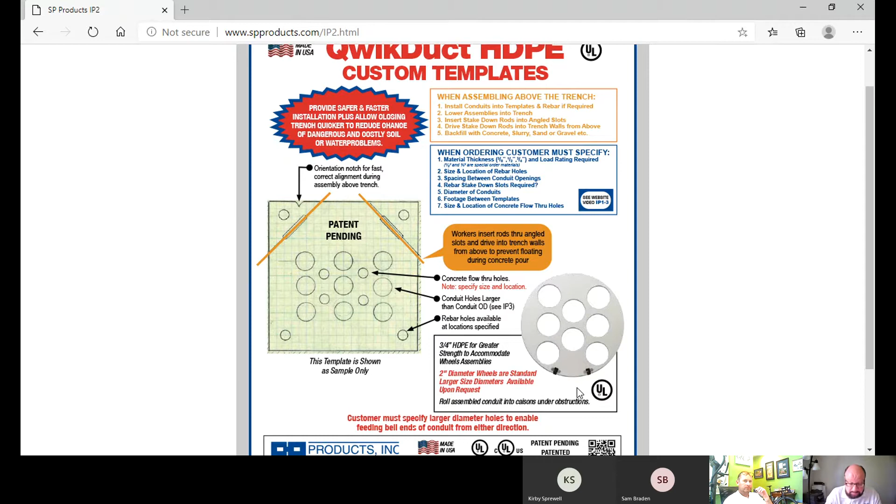So the other thing that we started with this product was we said, okay, so we're coming through into a manhole cover, or we're coming into a vault or a cavity inside a building. And most of the time now, you have to terminate or bring your cables into something. So what we developed was an end bell. And this is our PVC end bell adapter. We sell a ton of them.

It makes it very nice and easy for them to pull wire right into the cavity. It's very smooth, so you're not going to get it hung up on anything there, and you're not going to have any problems with your installation coming into the job. Now, I'll give you an example. We've done many data centers across the United States with this product, and we sell a ton of them.

Because when they're coming up into those server cavities, if you were using others, especially if it's any metal product, you're going to have bonding and grounding issues when you pull that cable into the equipment. With ours, you can pull cable directly into the equipment and it has no issues at all because everything's PVC. Saves them a ton of money. A regular data center job could easily use $1 million or more of these end bells plus our transition coupling line. And I'm going to show you that in a minute.

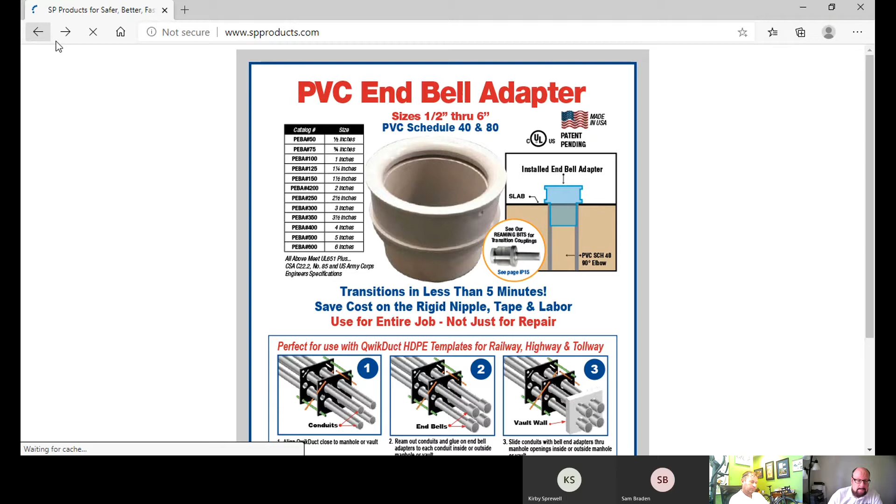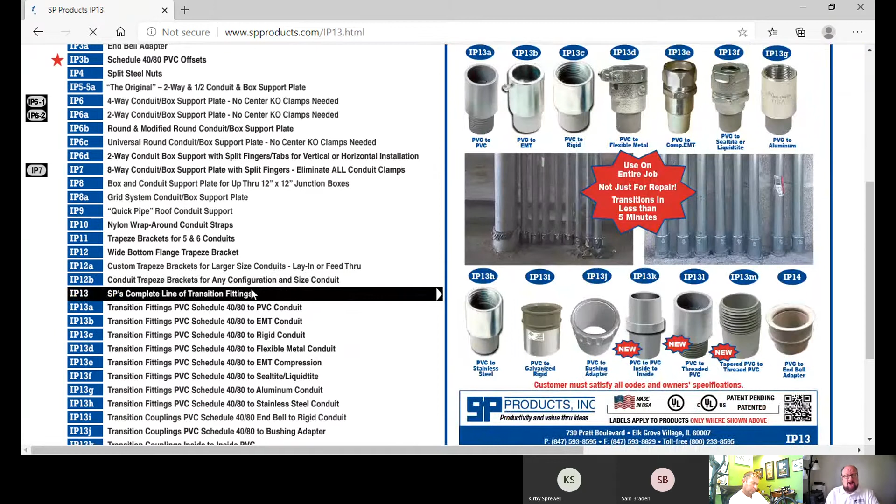So again, I'm still working and I'm building the building. I'm coming through my housekeeping pad and I'm wondering, okay, now I got to transition up. So when we call transition, the transition typically is coming through the slab, and now I got to convert it to another type of conduit. So what we do, we developed these transition couplings, and when we first started out, we basically had a PVC to EMT, a PVC to rigid, and PVC to PVC. That was our biggest movers initially.

And the reason being is when you come through that slab, most people are going to a metal product. Most of your local codes say that you need to have a 2-hour fire burn rating above slab. So that means most of the product has to be either fiberglass or metal to meet those requirements for fire and code. So what we did, we developed this UL rated assembly. We recently got the patent on this as a utility patent. So it's going to be about 17 years before any other manufacturer can make anything like this.

Okay. Now, if you've got customers that got stub ups coming through that concrete and, say, a Genie boom from the HVAC guy hit them and they broke pipes off, what do they have to do? They've got to notch the concrete. And I'll give you an instance. If you go into any contractor that does commercial work and you ask them, have you ever notched concrete because of a broken pipe? Most of them will tell you, yeah, I'm doing it right now. Well, here's a product that could save them a ton of labor units every time they're transitioning through the slab and to fix a broken pipe.

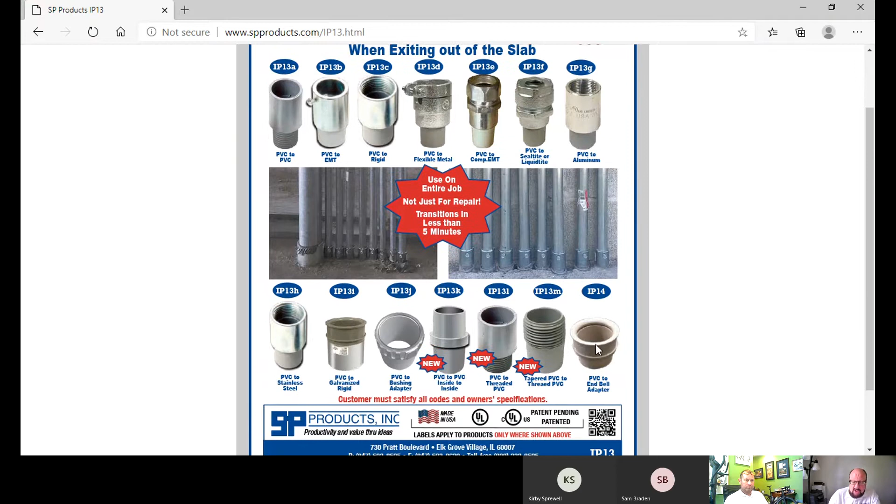Well, when we first developed this, again, I was telling you we had 3 of the major products, but then we had customers ask us, hey, what about Sealtite? Hey, what about compression? Hey, what about a squeeze style for the aluminum flex or armored cable? So we started producing a lot more of these products. And again, we've developed this whole family now of transition couplings. And again, our end bells are there. We make a PVC with threads on it. We make a PVC that's aluminum, stainless steel.

We're getting ready to make one that's going to be rated for corrosive environments like OCal or a PVC coating on the outside of a rigid conduit. There's other product out there now that they're using also. We came up with one right here in the middle. This guy right here is the PVC internal coupling.

Now that saved the contractor about 58 grand worth of concrete work because our coupling goes in the middle, inside each piece of PVC, where a typical coupling has to slide out over the outside diameter of a piece of pipe, which means it increases the overall diameter. Imagine if you're coming through a wall and your pipe's cut right there at the wall. Now you've got to notch every one of those pieces of PVC in the concrete and slide your coupling to get that OD over top so that you can use that coupling.

Then after you're done all that notching of concrete, you're going to send one of your apprentices out, or one of your low-hanging fruit labor guys. He's going to go to Home Depot, Menards, or someplace, buy some Sakrete, a 50-pound bag or more. He's going to get a bucket and a trowel, and then he's going to be a mason for the day because he's got to fill in all that stuff where he chipped it out and make it look nice, not only for the building owner, but also the inspectors.

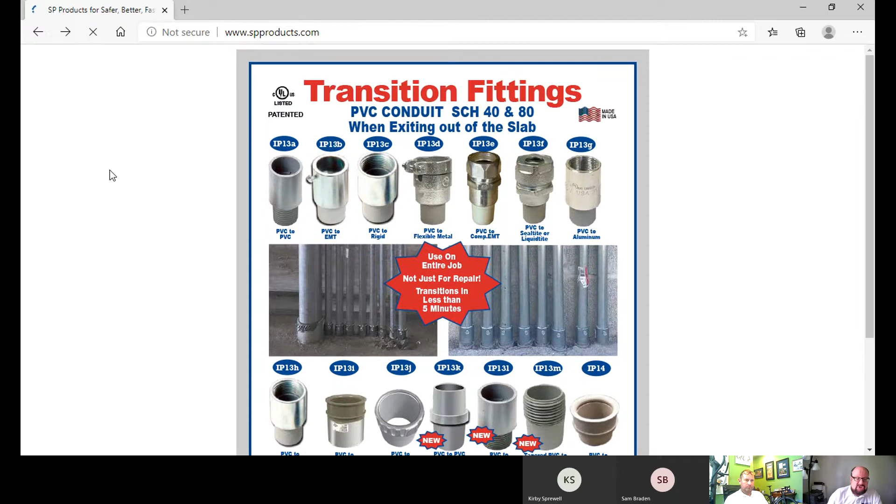On that PVC internal coupling, it only took us about 3 weeks to figure out what we could do for this guy, put it all together, and have UL product shipped on site so that he would be able to use it. So again, we have quick turnaround time when it comes to this stuff. And we'll have a separate sheet for each one of the different ones.

Let me just show you, when we go into the fitting, we'll go PVC to rigid, which is a real popular one. So what I do is open this sheet up, for a second here, the page isn't building, I don't know if my internet's slow or something, it didn't pop up. All right, so here's the page.

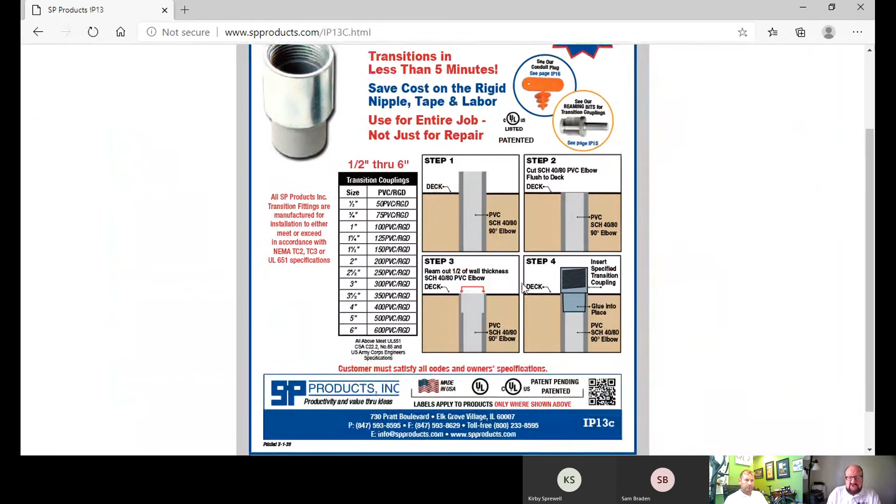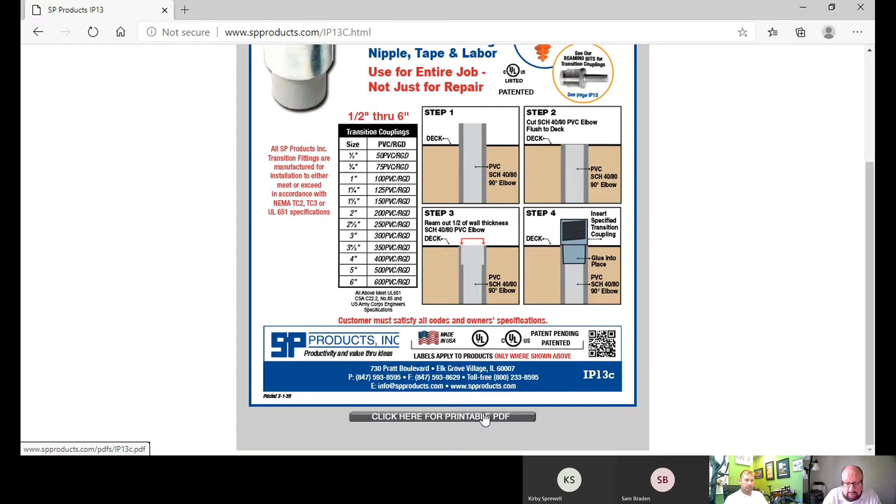Right down here at the bottom, it says click here for printable PDF. That's where you would click that button, and then you could right click the page that pops up and save that document. Then you could save that PDF, put it in an email, and send it to your contractors. That's how I send a lot of my information to contractors so they can see the product without having to go through the entire website. And this would be all the engineering information he would need.

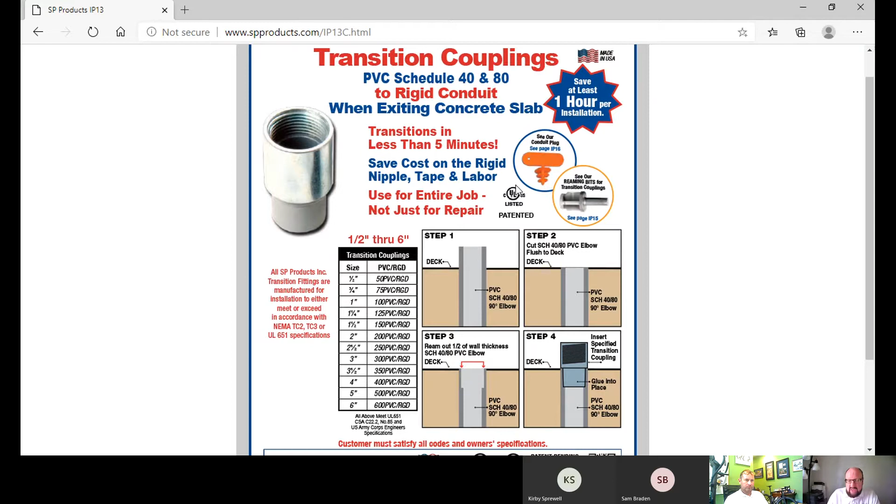We even sell these little orange caps that they can put on their stubs so no crap falls in the pipe while it's sticking up out of the floor before they transition. We also give you a little hole in that tab so they can put a pull rope on there, or they can label it. They can also label across the front of it. This little orange cap will handle multiple size pieces of pipe, and you just slap it in the top of your pipe and it keeps everything nice and clean. It shows you all the different sizes and the steps and procedures for how to install them.

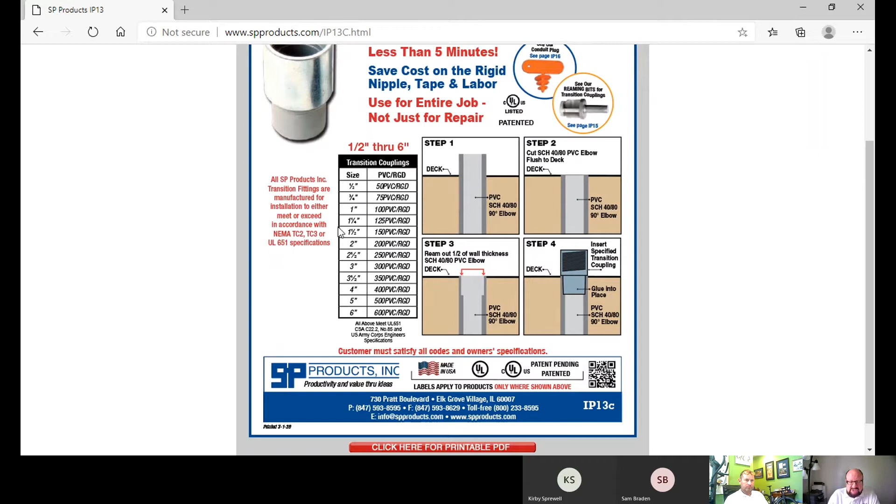And again, we sell a ton of them. And again, once I show this to a contractor, he's never going back to notching concrete again, because he knows it's a waste of his time. It's a waste of labor units. And to be honest with you, it's not the electricians breaking the pipe off at the floor. It's the HVAC guys. And they will never fess up that they did it.

But on any contractor project site, the HVAC guys come in with their genie booms and they just start driving those things around. They don't look down on the ground or where your stub ups are. They run them over. And next thing you know, you come in the next day and you could have 35, 40 pieces of pipe broken off in one big project. And now you got to send your young apprentice over there to start notching concrete to try to get an opening around that piece of pipe to slide a coupling on it. Very expensive, very costly to the bottom line of your job as a contractor.

So again, just ask the contractor, have you ever notched concrete? And once they say yes, I got a product for you. And then just show them this product and it will sell itself. He'll understand right away. And you as a rep, what we're going to do is we're going to give you a wooden block where we show you some stub ups, and then we'll also have a piece of pipe in that block. It's a 2x4 we use, and that piece of pipe will be reamed out. We'll also give you a 3/4 inch reamer bit and a couple of these 3/4 inch transition couplings.

And you could show the contractor, hey, put this in there, and now you can see exactly how it works. Stick your finger in there. You're not going to feel any degradation at all, no ridges or nothing. The finger's going to go through nice and smooth, and it will be transitioned perfectly, so they know there will be no catches or no hookups when they're pulling their THHN or wire through it. It's a great product, and we sell a ton of them. We have a lot of distributors now starting to stock them, so that's good for us. And we tell them only stock the ones that the contractors are using. And most of the time, like I said, they're using PVC to EMT, PVC to rigid.

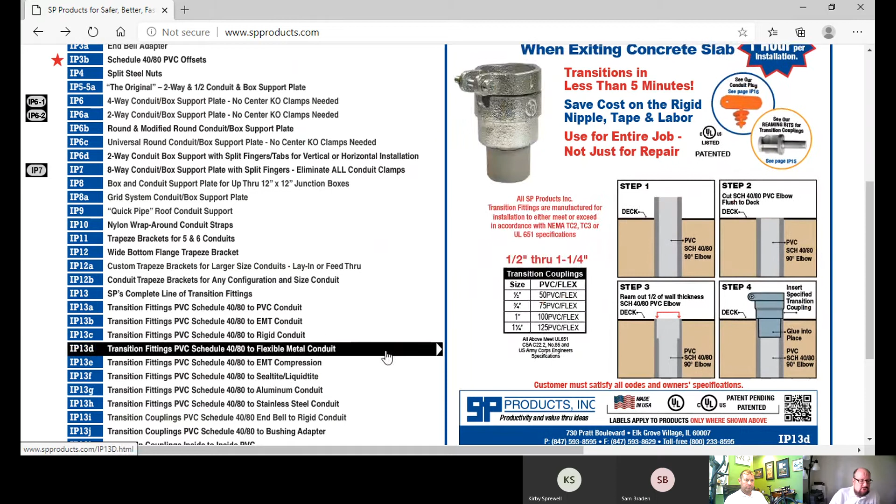So the next thing we're going to talk about is our trapeze. So our trapeze, we're coming to overhead now as we're doing the building. So now we're going to be running pipe in the ceiling. And I'm going to give you an instance. A lot of people use strut with straps, okay? So how I sell this product to contractors is saying to the contractor, okay, here's my trapeze. We have one with 5 holes and we have one with 6 holes. The 6 holes is fairly new for us. We started out initially with 5 conduits per foot.

So now when you start looking at your pipe, you're pushing that pipe through that opening in that hole, and you're putting your coupling on, and you're going to the next one. So now from a labor unit standpoint, I've got guys in Florida at $32, $37 an hour, and they're finding savings using this product.

So I know right now, if you come into an area, I'll give you an example, Philadelphia is $94.50 an hour for a union electrician. Go up to New York, Local 3, any of the 5 boroughs in New York, you're talking $130 an hour for an electrician. So when I sell this, I tell the contractor or distributor, okay, what's it cost you for a 10-foot piece of channel or strut, whether it be Steel City or others?

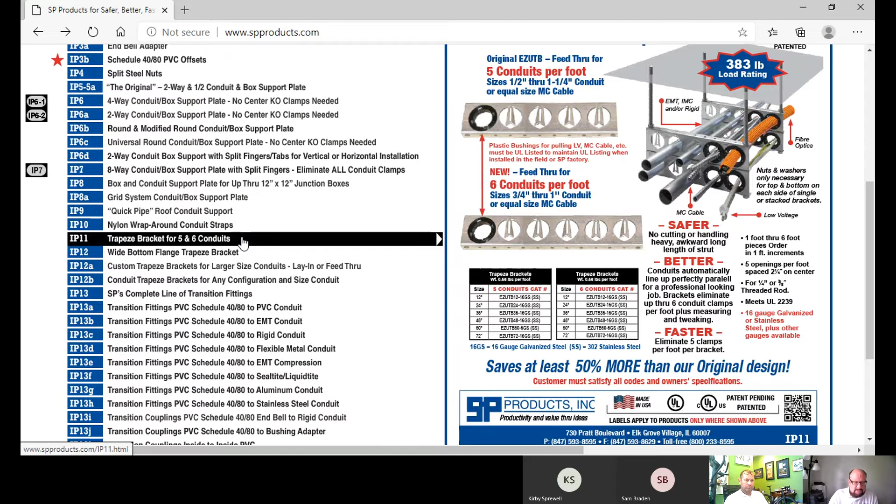We also make them in stainless steel, and we've sold a bunch of those for contractors doing work outside that needed to hang pipe across the bottom of a ladder rack or something like that, or cable tray to run some pipe through from one building to the next. Very popular. We also make a wide flange style that will go on the roof.

We also make some custom style and a large lay-in style. We don't sell a ton of them because these are one of the products that is not UL listed because of the cost of basically getting something like this UL listed. It would be probably about $300,000-$400,000 to do it because of the amount of material, the size of it. And you got to remember, all this stuff is based upon load ratings, how much it will physically hold in the ceiling or off a threaded rod. So there's a lot of heavy duty tests that UL does to make sure nothing will fall.

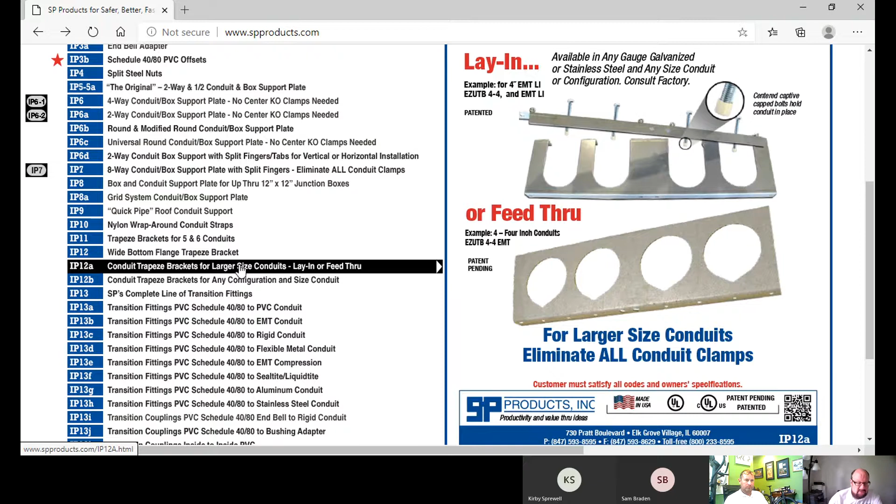So we do a lot of stamped steel on a project like this. Guy told us what he needed, sent us a print. We basically did one for him, sent it back. He approved it, and then we made a whole bunch of them for it. And again, we always do a submittal process on anything custom, and we make sure the contractor signs off on either a sample or a print before we start manufacturing. So there is no ambiguity of what he's getting and how it's laid out.

So the next thing I want to go to, we're up in the ceiling, and now we need to start hanging boxes from the ceiling, and we need to come down and have a box being supporting a plate and a conduit.

I don't know why this page ain't opening up. Here we get it to do it now. What? I apologize, but that's not opening up on there. I'm going to show you our two-way.

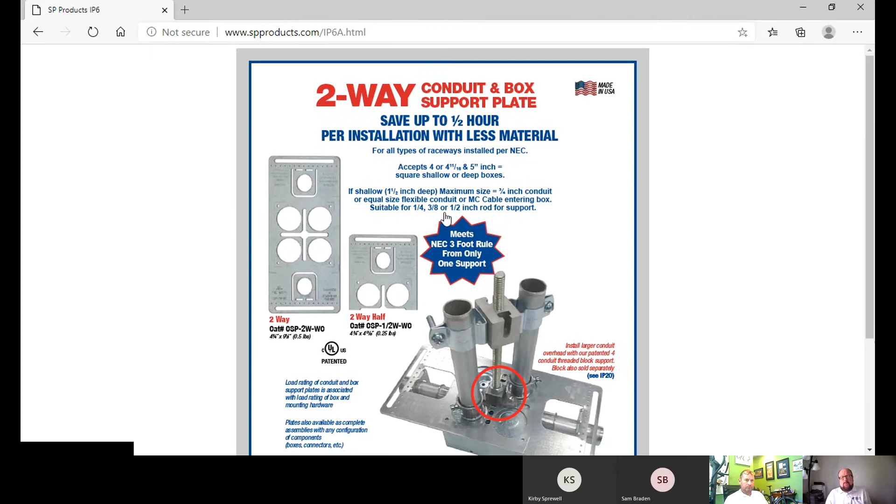So basically what we do is we have a steel plate. It's manufactured out of domestic grade steel. And what you do is you take this plate, you mount it to the top of your standard square box. It will work with numerous size boxes. Up here, it accepts a 4, 4-11/16, and 5-inch square. And what it does, it lets the contractor support the box with one piece of threaded rod, but more importantly, support the pipe coming out of that box.

Now, the code says that depending on where you're at, you have to support from the center of that box where that conduit meets out at a certain distance to hold and support the pipe. So initially, we made a plate called the CSP1, and I apologize, the website ain't opened that plate up, but that plate's just a flat plate with slots in it, and it basically gives you an X in the center that you can actually mount the box to the plate.

So now you use your threaded rod, and right here, you would basically use these tabs, and that would act as support coming through that tab for the conduit coming into that box. So again, that's going to save a contractor a bunch of money. How's that? Because typically a contractor would put a piece of strut in the ceiling, and he's got to have basically 2 or 3 spring nuts, one on each side to support each piece of pipe coming into the box, one to support the box itself, and then he's got to have the threaded rod come down, and then he also has to have either Minerallac straps or some type of conduit support strap to hold the conduit.

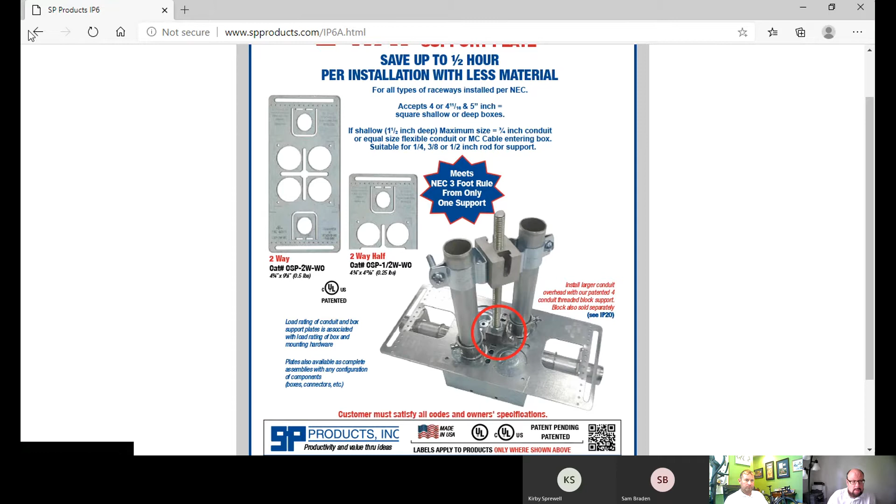On a typical job, like a hospital or hotel, we'll sell thousands of these plates. We're doing a hospital job in Delaware. On this one plate, like you're seeing right here, we sold roughly 3,000 of this style, okay? That's our 2-way. We also make it in a halfway. I also make one in a 4-way.

So now I've got 4 pieces of pipe coming in, and you can see here how it's supported the box. And again, makes it real easy. These tabs let you slide the pipe right through, supports the pipe all off of that one plate. The other thing that I do is I give you these slots. These slots, if you need to secure the pipe, you could still use a pipe strap if you want. We give them all the way around. We also give you perforated holes.

So now what I could do is once that's hanging up, I could take a strap, put it upside down on this slot right here, and use this slot with hardware, or better yet, what's going to save me more money is use a self-tapper screw and run that right through the top of here, and now I can run a conduit off of the top of my plate as a home run. So there's a lot of ways you can utilize this plate and save the contractor money, okay?

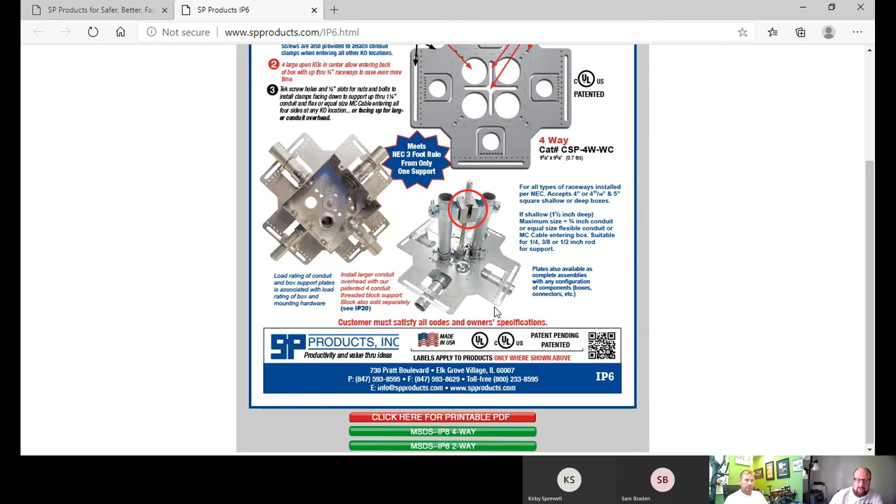On these plates alone, most contractors, once they start using them, they're going to keep coming back to you because they could save a bunch of money. And again, we also make a little conduit block support that we could put on the threaded rod, and now I could support back-to-back straps.

The code says you can never use 2 pipe straps back-to-back with hardware. That was not intended for that use. You could not find any intent in any engineering document, whether you're talking T&B, Bridgeport, or anybody who makes straps, for the intended use of putting 2 straps back to back. Do guys do it? Yes. Can guys get a job red tagged because they do it?

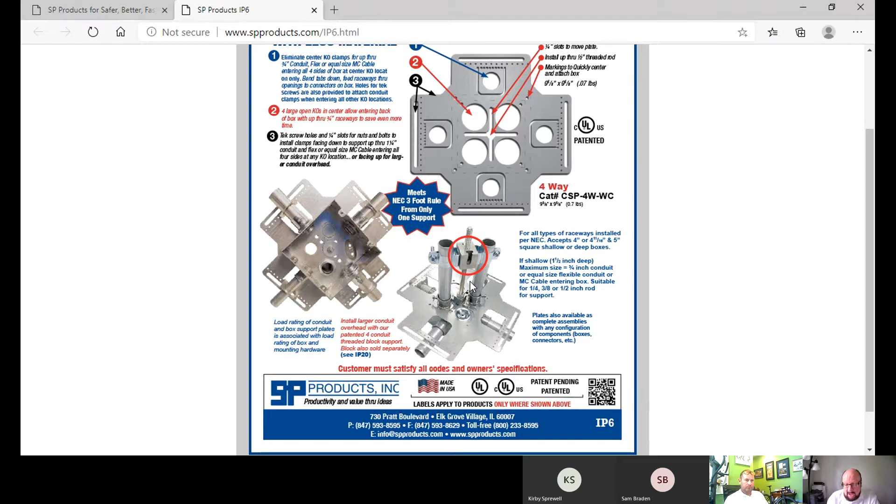Yes. Our block makes them have something in between it, and it makes it real easy to utilize. It's tapped, so you can just use a regular screw through it, or as you see that little dark area right here, that's a slot, so I can put a hex head through there. My threaded part will sit out. Now I put my strap on and a nut, and I'm good to go. And again, you can see the picture there. That's our 4-way.

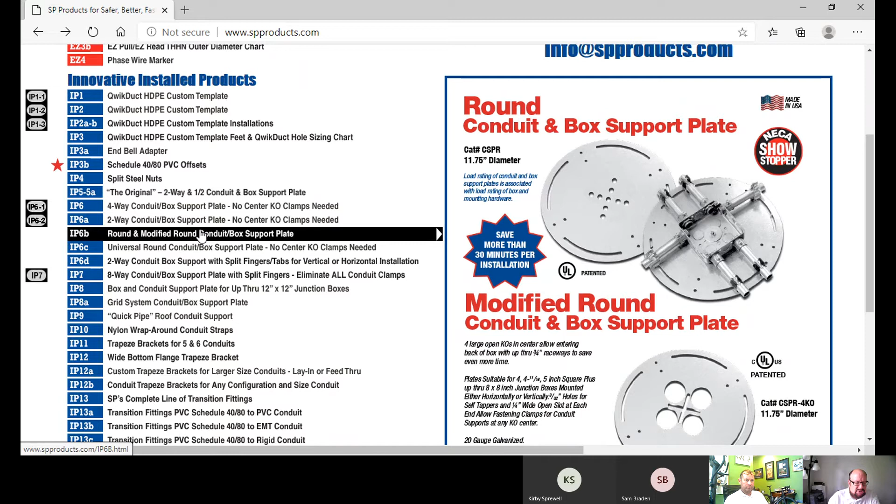I want to show you, we make a round style. This is so that you can bring in pipe in all kinds of different directions. We make a universal style. Now, one of the things that you're going to hear a lot more of is pencil rod. They started using this out in the West Coast, and pencil rod is basically like threaded rod, but no threads on it. So what they do is they use these little metal clips that spring and they attach to the rod, and it will keep things in place.

So what we did was we adjusted our plate. We also made it this style, the 8-way, with fingers. And we have large contractors, whether they be union guys or non-union guys, utilizing this plate for home runs, because I can bring 8 pieces of pipe into one box. I can also use multiple size boxes, and you can see down here, even up to a 6x6 as a junction box, and bring multiple pieces of pipe, and these fingers act as support and secure the pipe.

But we also put these little tabs in so that they can push that tab down and use pencil rod to hang this box either horizontal or vertical in a wall. So it makes it real nice and easy for a contractor to use. I'll give you an example. When we sell this unit right here, we'll sell roughly 6,000 of them for a large hospital job.

And right now, most contractors will tell us on our 8-way, they're saving almost 2 hours of labor and about $57 worth of material to support one box with 8 pieces of pipe coming into it. Now, when you start talking up in New Jersey at $89 an hour, and I'm going to get that kind of savings for 2 hours for a plate that will cost the contractor roughly $17, it's a no-brainer. Once they try them once, they love them.

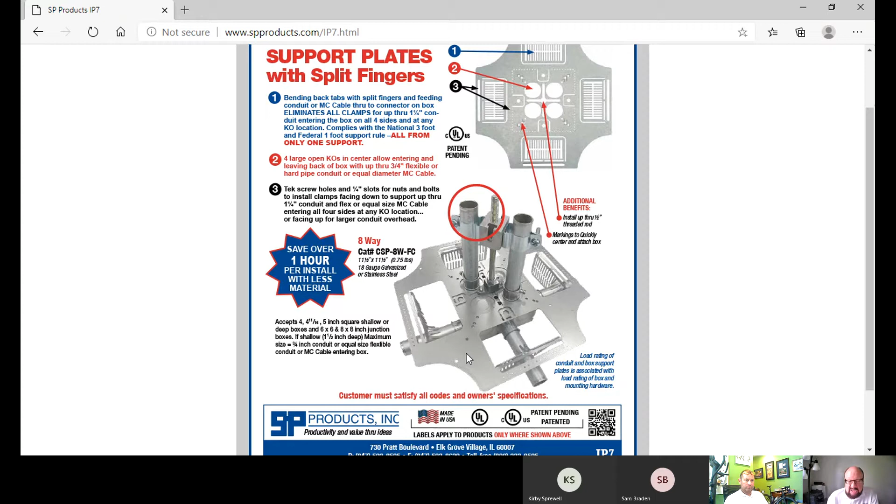And again, we have a lot of contractors that love this product. It's made with domestic grade steel, UL listed. A lot of times inspectors, when they first see it, they're like, man, I never seen that before. Let me see it. Once they see it's UL listed, they're like, man, that's a nice way of doing it. Have at it. So I've never had any local municipality or inspector say that we couldn't use it, because it is UL listed for this intent.

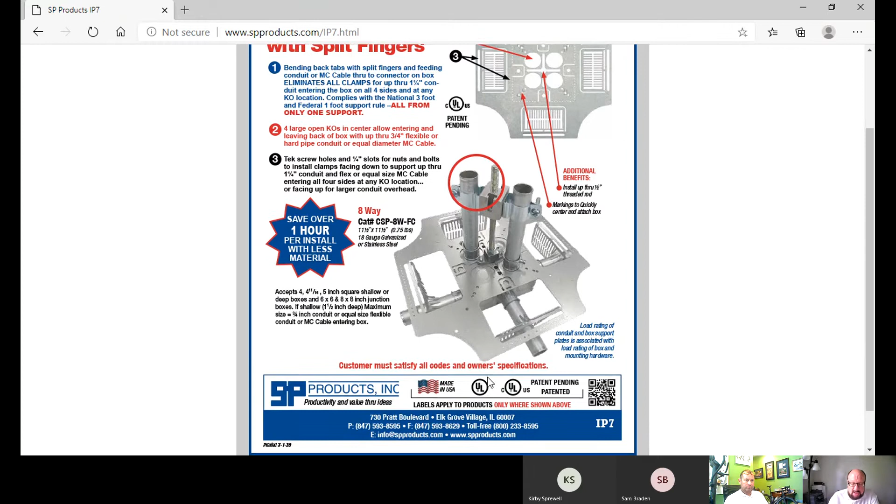And again, we give you here a little bit of a disclaimer when you start using a 6x6 junction box, because the fingers don't come all the way down. You can only use certain size pieces of pipe. But these fingers will be rated basically for anything from 1/2 inch up to 1 1/4 inch on a regular size 4 or 4-11/16 square box.

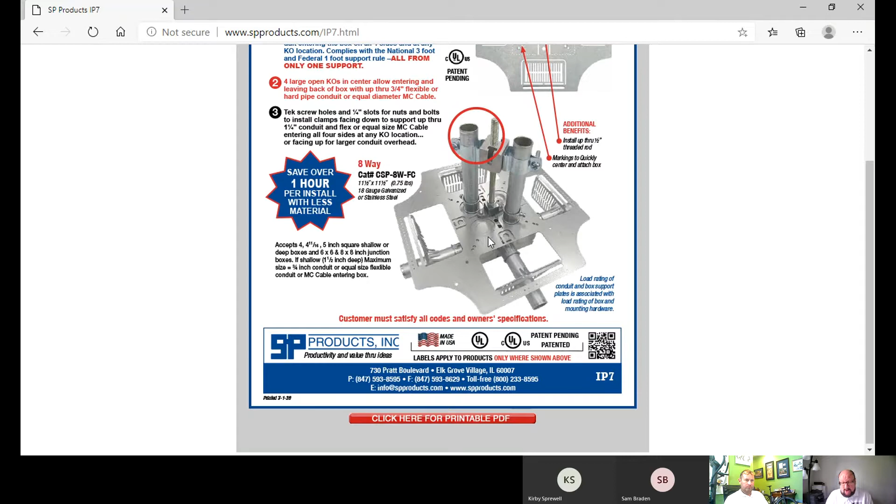Makes it very easy. Then that same philosophy, we said, okay, let's make one that we could utilize. And there's what we call our junction box plate. So this plate right here is a good size plate. It's our CSP 20x20. It's going to handle up to a 12-inch by 12-inch junction box. You can mount the box right to the plate.

We also then give you the slot all the way around it for your pipe support. So you can use a Minerallac strap, or some guys like to use those little black straps. They clip on, however you want to do it. And again, my product can be supported horizontal or vertical by these tabs.

So you push the tab down, and here you'll see 1/2 inch threaded rod with a nut on each end, and I put a beam clamp up there, and now I can hang it in the ceiling anywhere I want. Here you can see it hung off a threaded rod and how it's mounted. So again, makes it real nice and easy. I'll give you an example.

I was doing a daylight harvesting job with Lutron and a contractor up in New York City in the Bronx, and their internal shop costs are roughly $74 an hour. So he said to me, hey, if I got a kid out there, an apprentice, building a square to hold a 12x12 junction box, can I utilize this plate? And he said, I'm thinking about doing a prefab. The guy's name was Augie. I said, Augie, listen, let's do it this way.

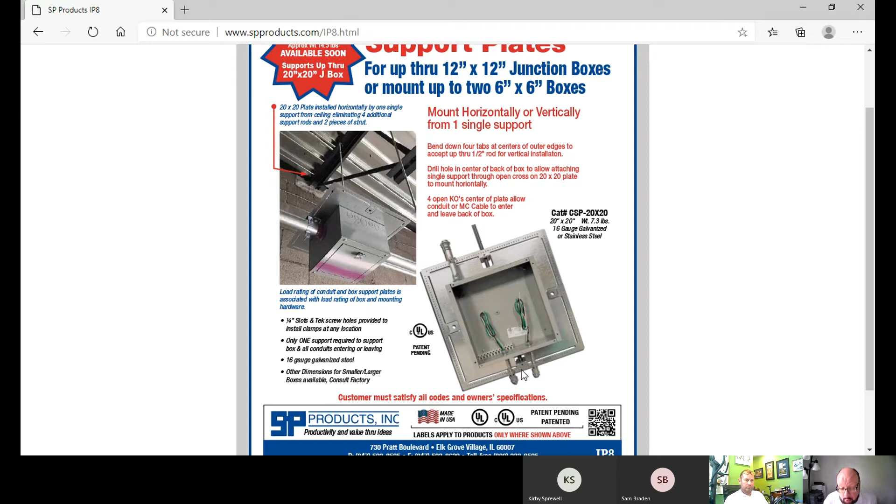And again, we give you the slot so you can support your pipe or your MC cable like you got right here. You put a connector on it, makes it real nice and easy. You can even use a one-hole strap with a piece of hardware. Makes it very easy to do.

And again, we're even in the process now of developing a newer one, a bigger plate to hang a bigger size junction box. But I got a lot of contractors that love this product. On our plate, you can't see it on here, but we got 4 openings on the back side of this plate, so we can come in the back side of the junction box if required. Makes it real nice and easy.

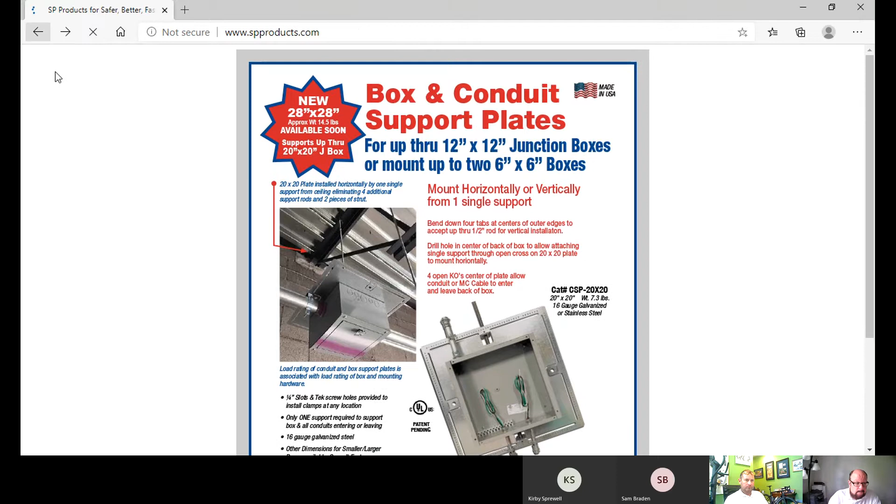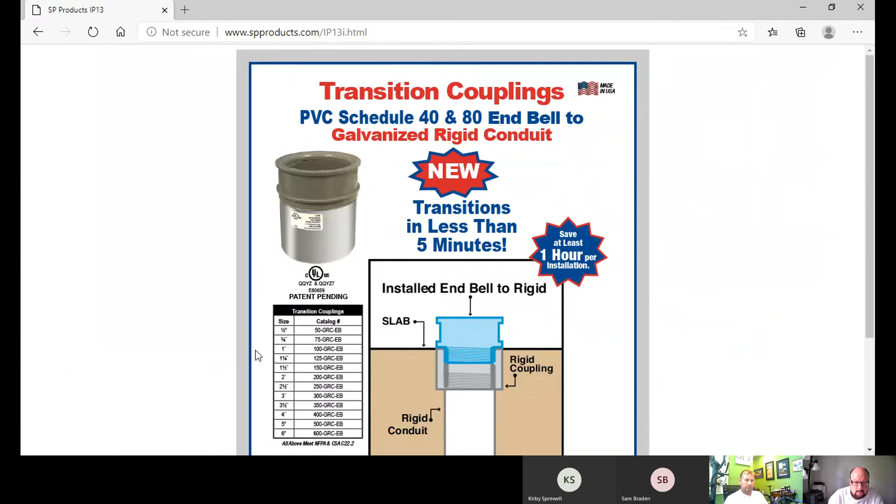We're in the process right now of developing another cap that we're going to use for what we call the tilt-up buildings. We're producing a cap that's going to go over top of a piece of conduit, and it's going to have like a weed eater string sitting out of the top of it with a concave top portion of the cap. So you could take some petroleum grease, slap it on top of there, put the cap on your pipe, and then when they come in and trowel the concrete over top of your conduits, that petroleum grease will turn the conduit and the concrete black, because concrete sucks the moisture out of anything.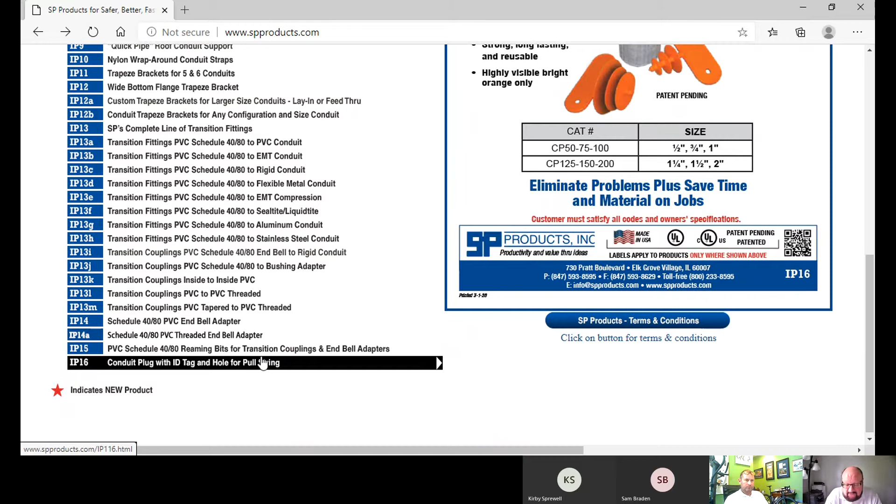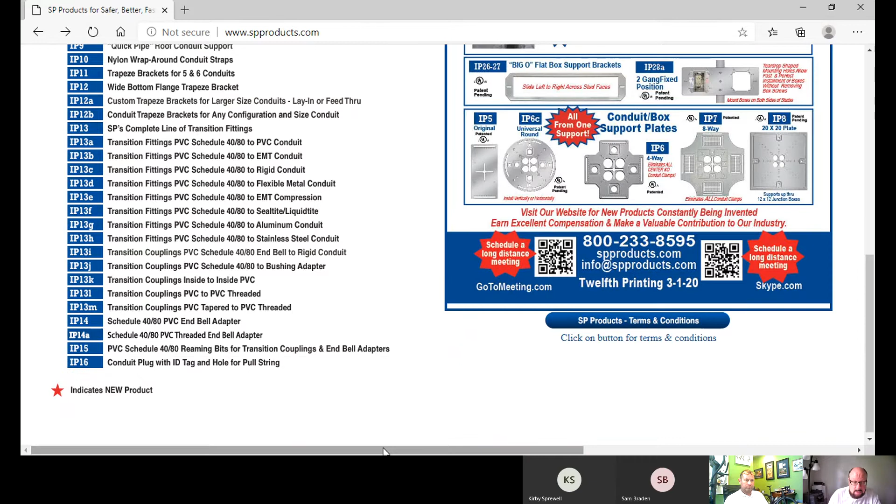So then you'll be able to find your pipes right off the wall of a tilt-up building. It will save a contractor many, many minutes every time he needs to physically go find where his pipes are after they build this slab and they bring the walls in and tilt them up. Now he's got to come back with prints and start measuring off the wall to find out where his pipes are. Now I'm going to go over, and as you notice, I'm going to use the scroll bar and go to the right-hand side of the page and start up at the top. We also make a center stop coupling.

The center stop coupling basically means that in the center of that coupling, there is no stop. Now, UL requires us to put a screw in the center of that coupling so that the electrician could still find the center if need be. The reason why we sell these is because a lot of times if you take 2 pieces of conduit and you're putting them back to back, it's very difficult to get a coupling in there.

Peter developed this product, I believe it was back in 1971, and he was actually on a job site in Texas, and as he was driving by, he saw an electrician's trailer where there were a couple pickup trucks, and the lights were on. So he pulled in, knocked on the door, and that's how Peter Vrain used to do a lot of his business. He would drive his old Caddy and just stop different places and ask questions. So he walked in and he saw this superintendent sitting there grinding out the center of couplings.

And he said, "What are you doing?" He said, "Oh, on these rigs, we got a lot of big 2-inch rigid pipe that we have to put elbows back to back. It's a pain in the ass to do it. If I could take out this center stop, I could slide that over a little bit and I could get the 2 pieces of pipe together." So Peter was like, "Hey, I can make them for you." So he came back and developed this product.

We also make masonry block supports. Now, ours is a little different. We have guys out there like Caddy, and they make a product that utilizes spring steel. Our product is not spring steel. Our product is much more rigid. We make a single gang, a 2 gang, and we can actually mount ours to any box. And it's basically a clip-on where it's got a little set of teeth that mount to basically an eccentric knockout. So once you clip it on, you really need to use a screwdriver to pry it back off. Some guys will clip it on and then run a regular screw into the back of the actual box itself.

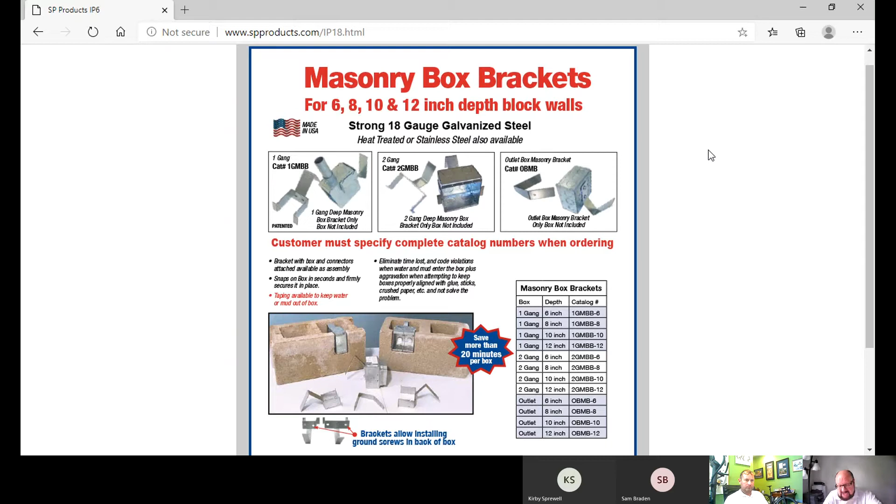But what happens is, when I was a kid, an apprentice, and we were doing block wall, we would find all the garbage on the site, and we would stuff it inside that concrete opening so that that box wouldn't fall back into the hole. Okay, so then they started producing different styles, and again, spring steel, the problem with that is, once it's in that hole and you start pushing your devices and your wire, especially if it's solid wire instead of stranded, it pushes the whole box right back into the masonry block. Pain in the ass. Now you have to try to get your lineman pliers in there to pull it out, and then you're going to use wooden shims to line that box back up with the face of the masonry block. So it was very difficult to do.

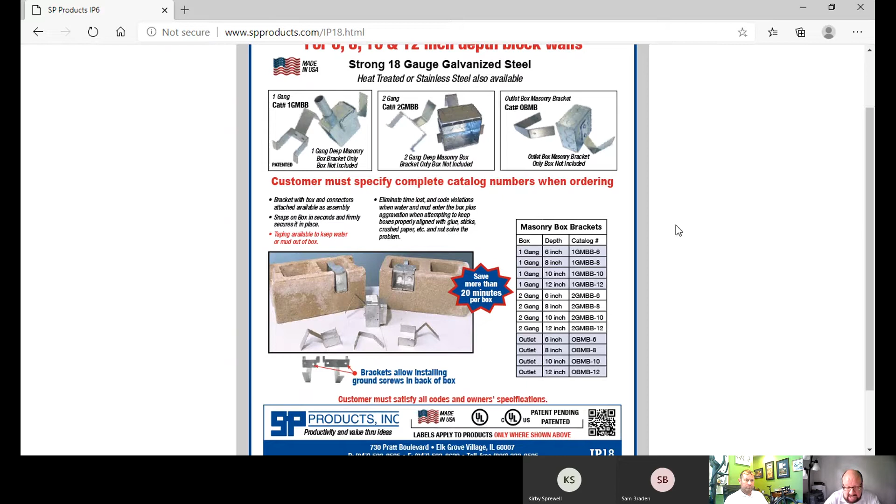Ours is not going to bend like spring steel. All right, makes it very easy. We sell a lot of these to guys doing work in schools and old style buildings like you would find in Northrop Grumman or Lockheed Martin, that have a lot of concrete block walls throughout their buildings. And again, it just makes it really easy to put it in and make sure it doesn't fall back into the block.

We also make one that's adjustable. We just developed this probably less than a year ago. This thing will cost roughly less than 40 cents. But the nice part about it is it's UL listed, and each one of these lines is a score mark to tell you the depth needed to give you back box support. So a lot of times if guys are putting something in a wall, they want to make sure it doesn't fall back into the wall. So they'll use back box support.

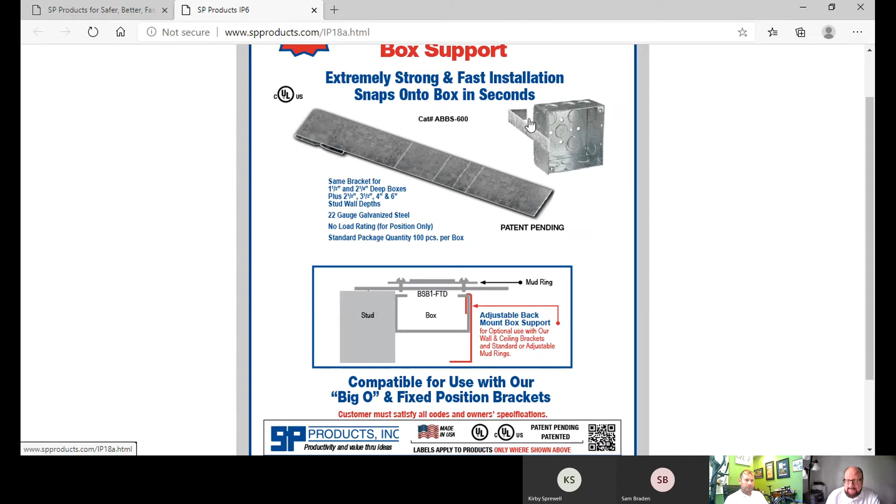These things are really easy. They just clip them onto the side of the box. They score it and bend it with their lineman's pliers. And again, you can see the different types of depths. And again, with ours, once you put the mud ring on this box, that piece is never coming off. It's stuck in there and it's sandwiched in between the two.

We sell a bunch of these, again, to guys doing any type of schoolwork or a lot of different installations. But again, we developed this because we didn't find anyone out there that was making something like this with different score marks on it and UL listed, made with domestic grade steel. So again, if you're doing work at a federal military base or something like that, this is Buy American, baby.

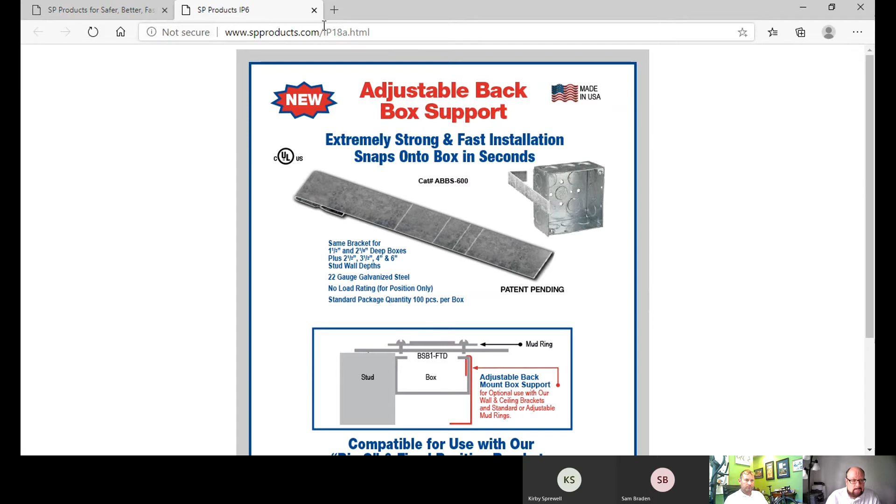All right. And again, as you've seen on some of the other pictures, we make what we call a 4 conduit block support from only one rod. And this allows you to basically marry up 2 pipe straps back to back to support. So we make these in a lot of different configurations, and you can see down here in the bottom different examples of how they're being utilized.

I sell a lot of them that use them in this configuration right here with some pipe straps, where guys are using them when they come in and they're running a gen set throughout a building. They're running a lot of those cables up in the ceiling. It's an existing building, and now they're putting a gen set in there. So they'll use the armor clad aluminum cable running through the ceiling. They'll use one piece of threaded rod, and now they can support multiple pieces of armored cable off of that one piece of threaded rod with our block and utilizing pipe straps.

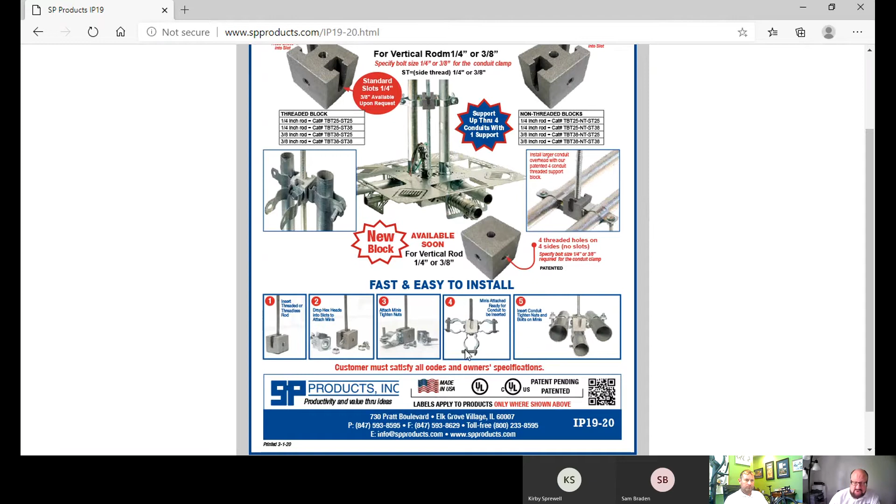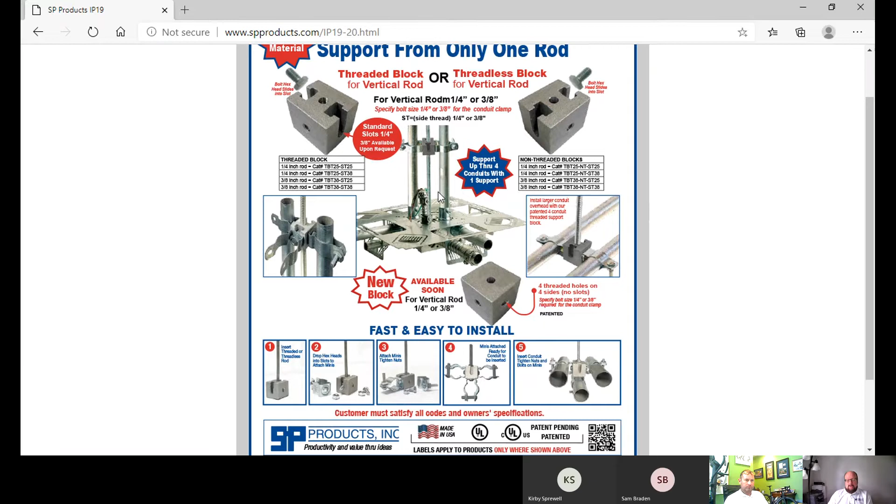Makes it real easy. Again, we utilize this a lot in prefab applications. We have a number of customers. MC Dean doing the Microsoft job, data center in the Richmond, Virginia area or Northern Virginia. They buy like 1,000 of these at a clip to utilize. And again, it makes their job a lot easier. You can do a number of different ways to support it.

We make truss hangers. Ours are a little different. So what we do is we actually weld all of the truss itself, the part that goes through this part of the truss. We weld it all up with a piece of threaded rod, and then we put a nut on it. We also put the plate on it. Now, the nice part about this, it's got these little teeth right here where when you push this up into that truss and turn it, it actually falls down in there, and there's no way for it to come out. Okay, so again, you can see the J-style hangers to hang pipe off of those trusses.

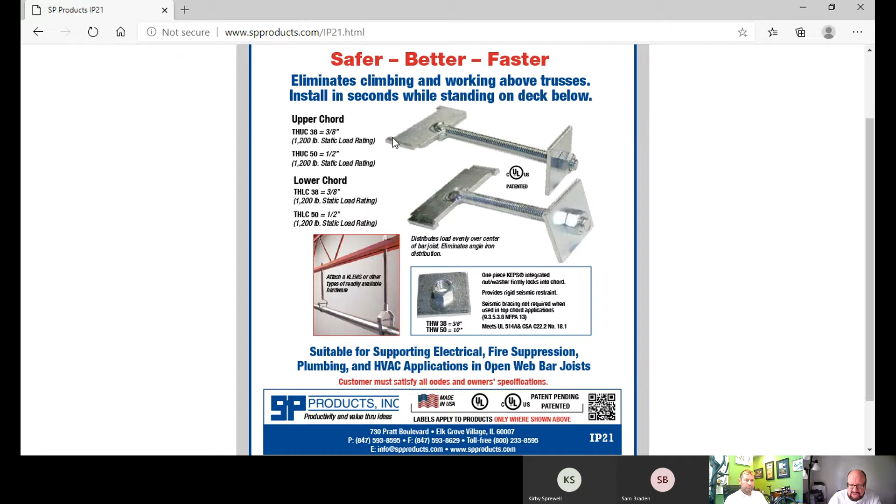Now, what a lot of guys do is they buy a piece of threaded rod, some fender washers, and some nuts, and they got somebody physically there cutting the threaded rod and making them up themselves. Ours, we make it with a welded piece on the top, so it goes through the truss properly, and it's got the little parts that stick out that will lock into the truss. So again, we sell a bunch of them.

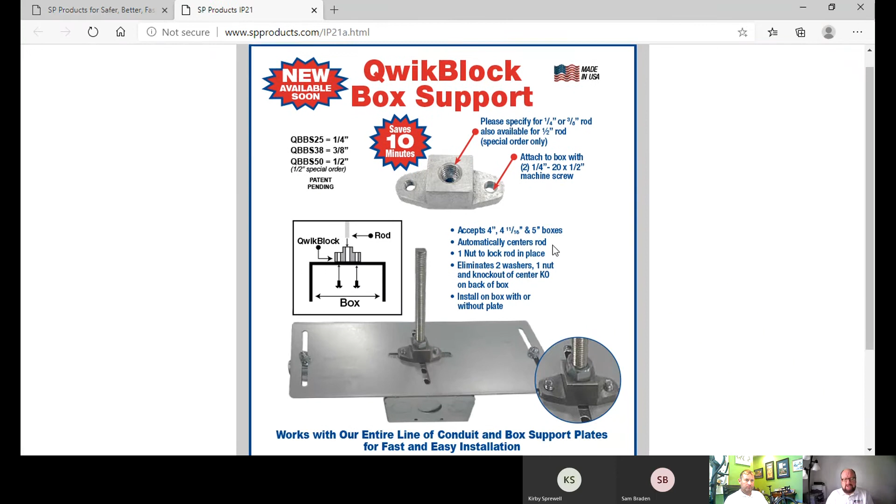And now let's show one more product here. Our QwikBlock support. This is really cool. Our prefab guy, his name's Suresh Patel. He's been with us for probably 42 years. He's the vice president in charge of manufacturing at our plant. Very, very smart man. And he does a lot of our prefab.

We just did a prefab job out in the Vegas area, 600,000 touches of putting product together. Not one mistake, not one error. Everything delivered 1 week before the contractor needed it for his drop dead date.

So one of the things that people do is when they use the threaded rod, they typically put the threaded rod through the plate or into the box, and then they use a fender washer and a nut on both sides. The problem is they're using the knockout of either a 1/2 inch or 3/4 on that 4-inch or 4 11/16 box. The problem when you do prefab, you put all that together, then you throw it in a box and you drive it out to the job site.

A lot of times it loosens up because the threaded rod is smaller than the opening of the concentric knockout, and it moves. So now I got an electrician that I'm paying $45 an hour to retighten nuts up on a piece of threaded rod. Waste of time, waste of money.

So what we did was we developed this little block, and now the block mounts, and again, with ours, we have tapped holes, so we actually bring the screw right through the inside of the box into our little support here, and it basically takes up no fill space inside the box. So a lot of times you got to remember, if you've got a threaded rod in there, you got a nut and a fender washer, and if a guy cut it, maybe there might be a sharp edge where he's threading it back on.

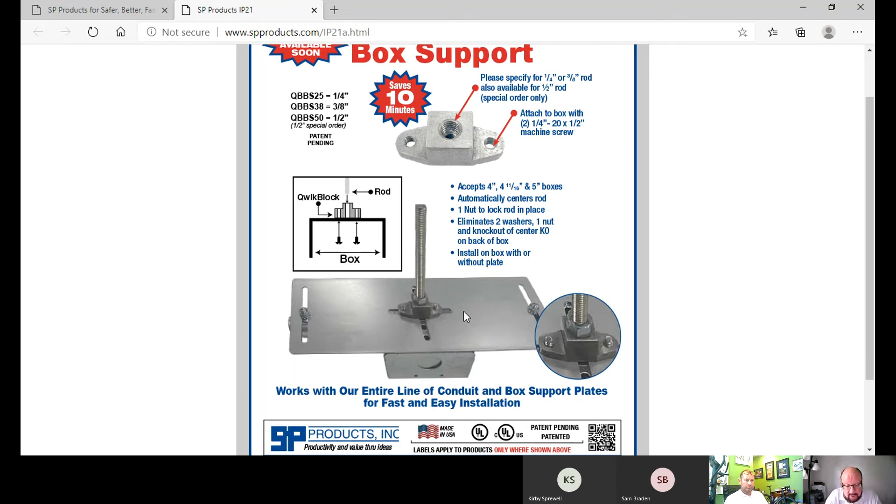Okay. So another big product we sell a lot of in terms of prefab shops. We also make what we call a cinch clamp. Peter developed this thing back in 1973. I have sold some of these, but usually, like with 4-inch, to be competitive with a 4-inch T&B strap, I need to be at about 500 to 1,000 pieces of this to get down to those levels.

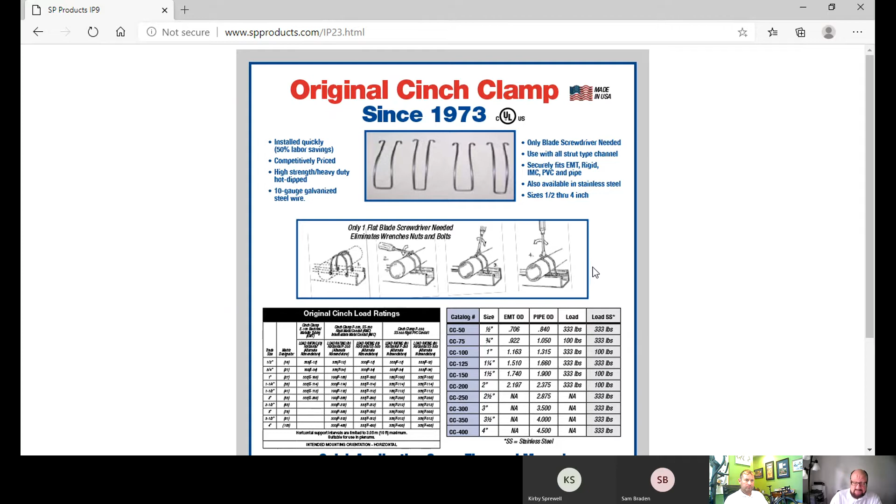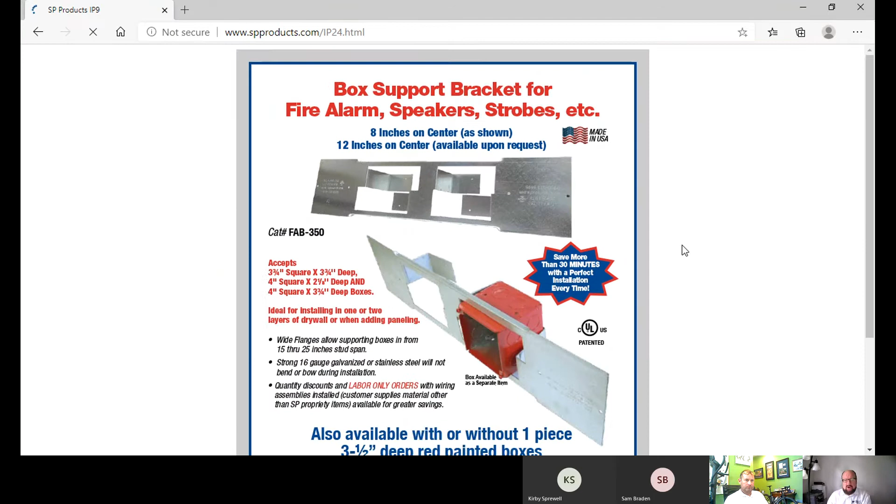But again, where I'm going to save them money is I don't physically have to have a guy sitting there with a drill or anything. I basically use a screwdriver and I clip these things on and I'm done. So again, that's where the labor unit savings comes in, and we have those in stock. Again, all these products are stocked out there in our Chicago, Illinois branch. This plate here, we sell a lot of these, and one of the things I've been doing is trying to market these to people that are doing fire alarm systems like Honeywell and folks like that.

Now, a lot of times you're going to find contractors are getting more involved in the alarm systems, CCTV systems, security systems, because the contractor usually gets the bid for all this stuff, and they basically say, hey, since I'm already running all the wire and pipe in the ceilings and down in the walls, why don't you just let me take on that portion? And then the Honeywell guys or whoever it is can come in and install the equipment and do the commissioning on the job, right? So that's how the electrical contractors are trying to diversify themselves and broaden the breadth of the stuff that they're installing inside these buildings. Again, they're doing the same thing with lighting systems, the dimming systems, and all those things.

You go to any IBEW shop now, they usually have labs set up for the apprentices and also their journeymen where they will train them how to do alarm system work and dimming system work for daylight harvesting and others, Lutron and all the others. So again, they have qualified electricians that can go out in the field and install this stuff. We make this plate, and it's the only one out there that will handle a deep box like this, and they're mostly always coated in red. And this is where you would put an annunciator and the alarm side by side, all on one plate. Makes it very easy. We sell these to a bunch of contractors that have gotten into doing fire alarm systems for their projects.

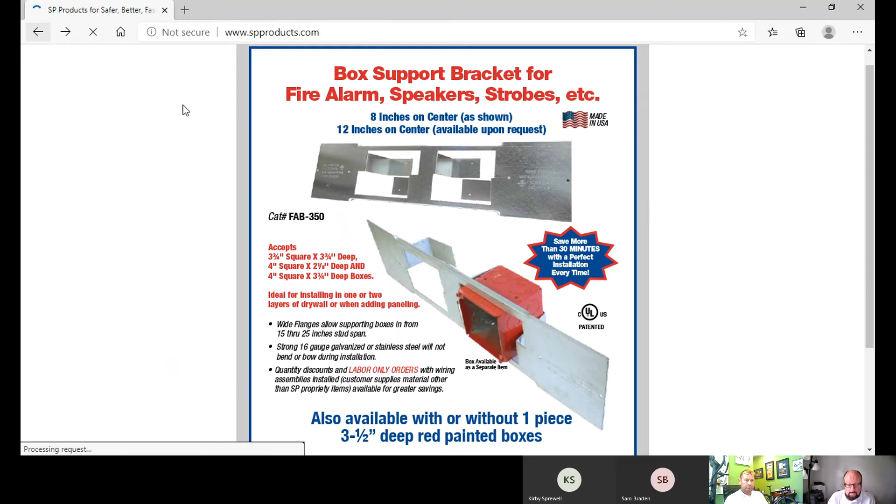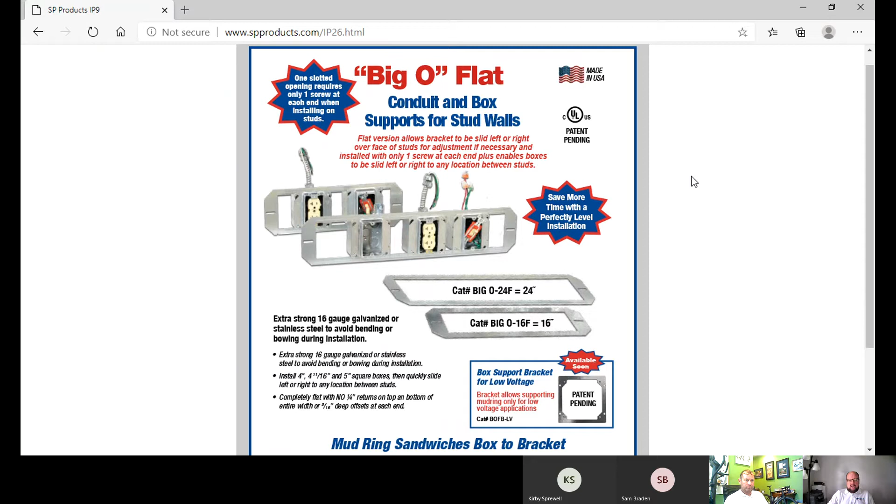And now I'm going to come to our Big O plates. So now we're talking about rough in, and you need to put the box or the devices in the wall. We make what we call the Big O flat. Now, this is a flat piece of steel. It's, again, made in the USA with domestic grade steel. It's UL listed. And what we like to talk about is touches.

And that's how I talk to contractors. And when I used to train apprenticeships, I'd always tell them when they started, we're talking back in the late 70s, early 80s, hey, think of touches as a ration of time as a labor unit. And every time you touch something, it costs you $1, right? We'll say it's $60 an hour. Every minute's $1.

So when we look at it, we say, okay, if I take a caddy bracket and I got to take a box and put it to that bracket, and say I'm doing it in prefab or I'm doing it out into the field, a caddy bracket is going to be roughly 9 touches. You're going to have to take the bracket apart, you're going to bend it, slide it back together, and then you're going to mount your box to it. And then you're going to take self-tappers.

They basically have a little drill bit on the end that's threaded. They call them Tek screws. And then you tech screw that into the plate. Once you tech screw it in, you're done. You can't move it. With mine, I'm 3 touches. I take a box and a mud ring, and I sandwich it in between my Big O flat. And I make this in a size 16 and 24.

So when we talk about touches, imagine if you're doing a 100-story office building and the other guy's 9 touches and I'm 3. That's a differential of 6. That's huge to the bottom line of labor units for your job. So when we start showing this to contractors, we also say to them, hey, bud, remember, on the face of ours, we put 1-inch designation marks, score marks across the face of that. Makes it real easy to line up multiple boxes as you see in the picture.

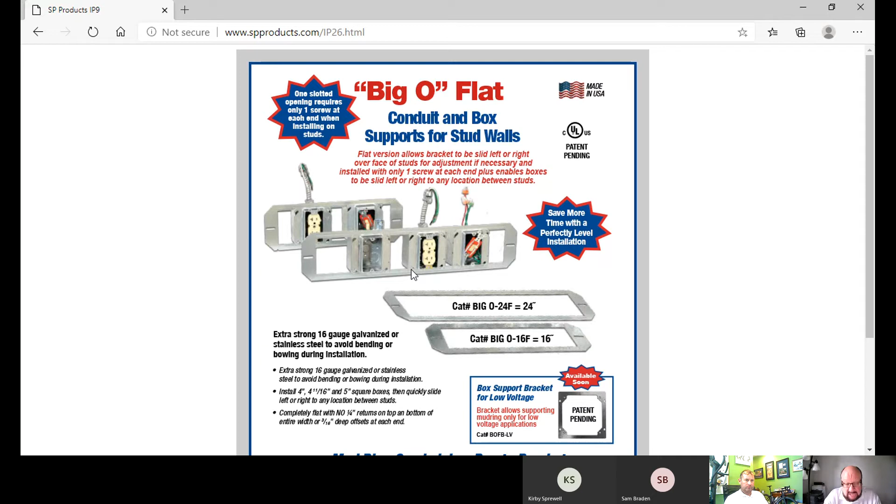And that's our big flat O. And again, we have a lot of contractors stocking them. We also make what we call a dual wall box support, very unique, where we can use the same 16-inch or 24-inch cavity, and we can marry a box back to back for commercial buildings. We do this in a lot of buildings, whether it be a police precinct. I just did one in Ohio, a fire department.

Remember, a lot of times you got a receptacle right inside the office, and you got one in the hallway. In most hotels you do, because the girls or guys need to basically plug in the vacuum and vacuum the hallways, right? So here I could put 2 boxes back to back in the same 16-inch cavity. That means I only have to drop 1 MC drop from the ceiling for my home runs, and I could save myself a bunch of money.

Now, I will tell you, in certain areas, you have to verify by code, because if you put a system together in the same 16 or 24-inch cavity back to back, because of fire regulations, you might have to use a putty pad inside there so no flame can go from one room to the other room. Okay, that's not happening in a lot of commercial buildings. That's more where there's people living in them or residential.

And where I do this a lot is even out in the state of Michigan on a lot of the dormitories, they buy this, but they need to put putty pads in it because somebody physically as a human being is living in one room and also the hallway is accessible. So you got to put a putty pad in it. But most jurisdictions don't require that in a lot of commercial buildings, like the police department, the fire department, and stuff like that, because nobody's living there.

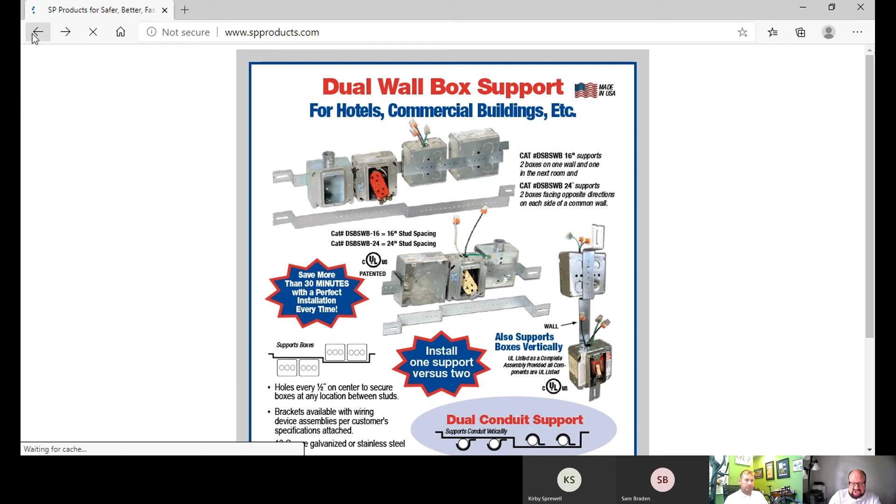So again, just an easy way to do it with dual wall support. A lot of prefab guys like this because they could set it up in the walls and get it all set up real easy back to back. And again, we make a conduit and box wall support. This one here is just a flat plate that you can marry up boxes to. You could also use one-hole straps to support your conduit.

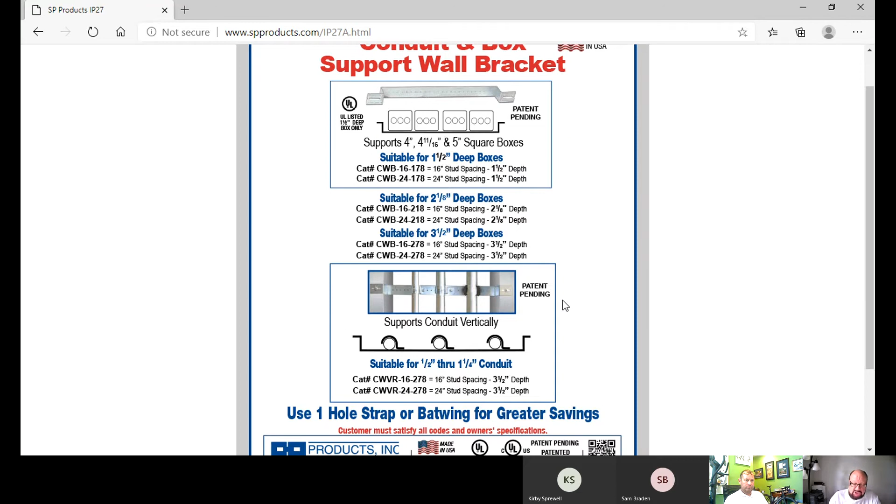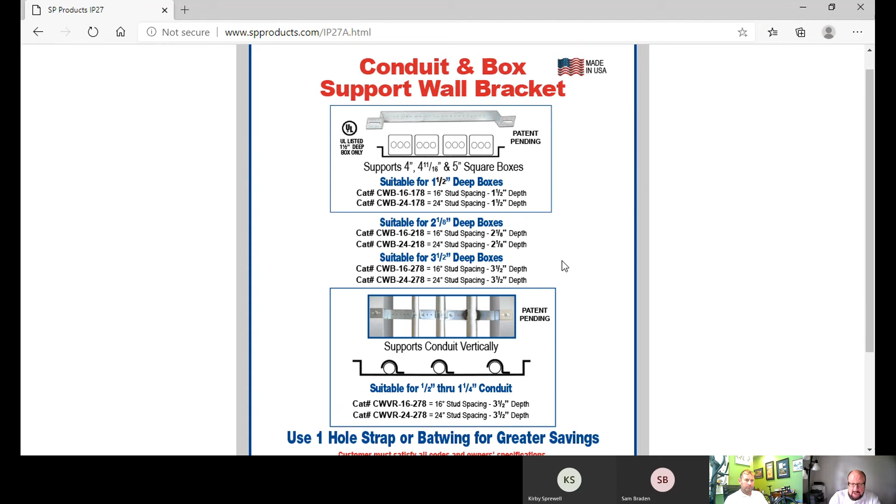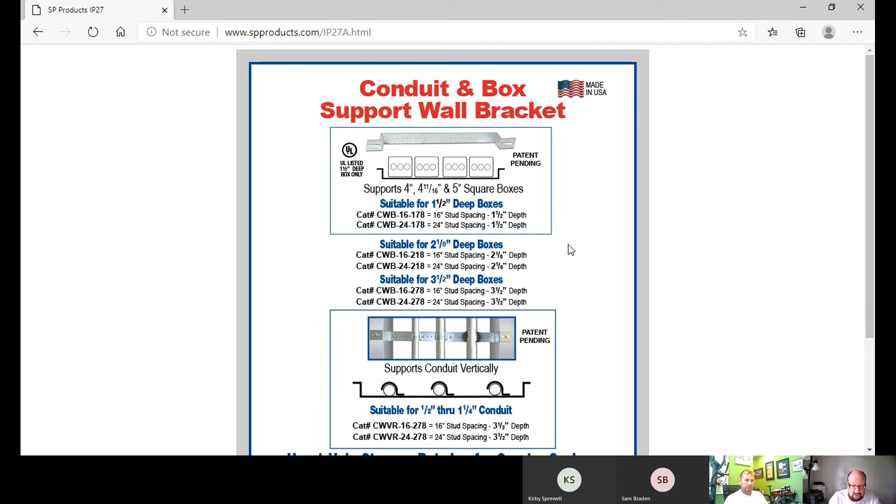We do a bunch of this to segregate the conduits running through those cavities, going up a wall from one floor to the next. And again, it just makes it real easy to use one piece of strap already bent for you. Now, we went into some contractors, they were actually bending stuff like this themselves. It was costing them money to do it, but they figured that was the easiest way for them to do it. When they seen ours, they said, we ain't doing that no more because of the labor unit, you guys punch these out in the thousands. We'll just buy them from you.

And here's our next one. Now, this flat fixed position, one box support bracket, we sell a bunch of these. Again, we do these in a lot of prefab applications. And you'll notice right here, we put the UL sticker on the box because it's an assembled prefab device from us. We put a metal cover on it to keep it all clean when the good drywall guys are in there. But we also use the Wago blocks.

So all you're going to do is, if you add a piece of MC, you put your connector on it, you strip off a little bit of your wire on your THHN, you plug it into the Wago block, then you stuff each Wago through that hole, put your MC connector through in there, and basically you're done at that point making your connection. Now, the thing with our plate, it's going to handle multiple boxes and sizes.

Teardrop, so I can work with one hand. We're going to give you 4 slots on each side. So now I don't have to designate. A lot of competition, you have to designate whether it's left or right mount. Ours, you don't. You could use it either way. And when you get our sample product kit for salesman kit, you're going to notice how rigid this plate is. We developed this plate for the Bellagio Hotel and Casino in Vegas.

And what happened was he bought a whole bunch of product and he returned it to the distributor because the product that he was using was made out of spring steel. It also had a little back support in it. It designated whether you had to use left or right. But his problem was when the electricians went to stuff either the switch or the receptacle back in the box, that plate twisted in the wall.

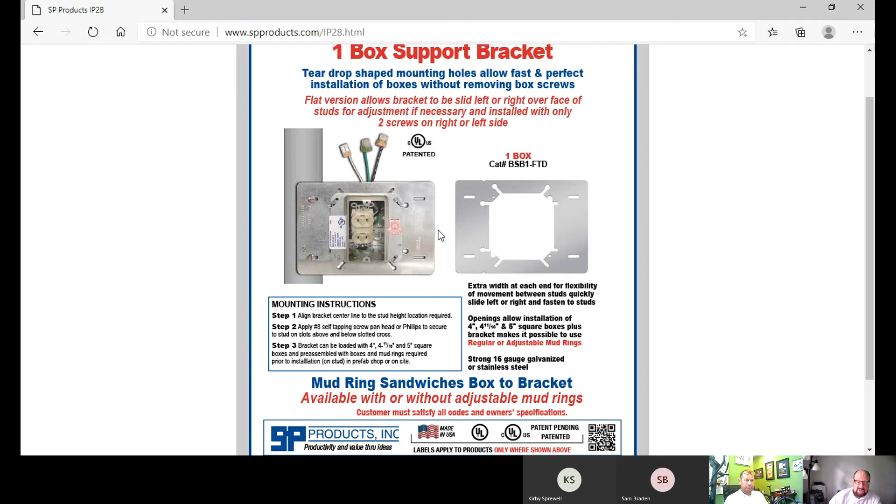So again, great product. We sell a lot of them, sell them on military bases because it's a Buy American type product, made in America, UL listed. So we not only make it as a single gang, we also make it as a 2 gang. Here's a 2 gang, and this one here, center stud mount. So now I can be on both sides of that cavity. I can use one for datacom, one for power. Okay, makes it real easy.

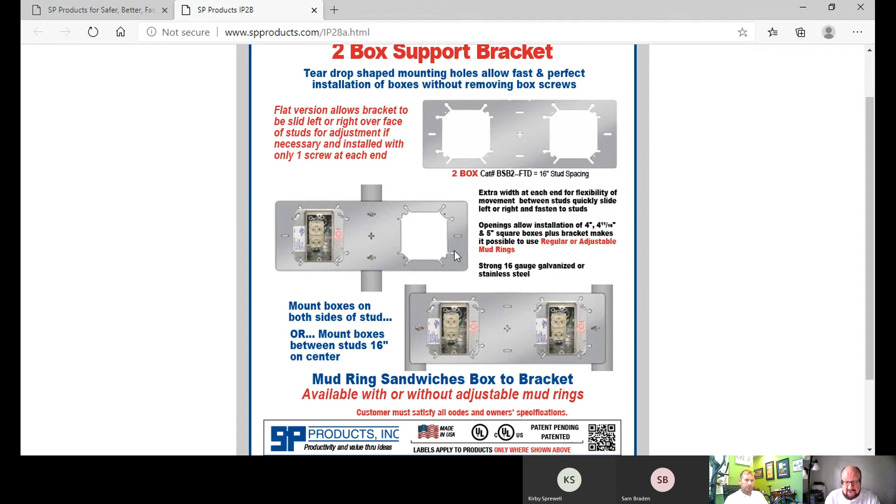And since it's center stud mount, no back box support. Again, my plate's very rigid. I can use multiples. I can even put an adjustable mud ring and mount it to the front of this plate and put any size box behind it. We have a lot of contractors doing that right now.

And the reason being is most people, if you're going into any type of project and you've got grout and tile, right now you don't know the thickness of the tile. Even the prints sometimes don't tell you. And again, how much grout are they going to put behind that tile? So the code says you're allowed no more than a 1/16 of an inch differential between the surface of the plate and the mud ring. So we've got guys now in Philadelphia, New York, New Jersey.

The inspectors are carrying calipers, and if you're over, they're telling you to rip it out and put in an adjustable mud ring. So that could be very costly if you're looking at tile work, because again, as an electrician, we don't do tile, man. It's done by somebody else. So you might have to call that tile guy back in and say, hey, I got to cut this opening up to get in there to take out that mud ring because we sized it wrong, to put an adjustable one or put the right one in there, and then come back and redo the tile work around it.

That's costly. So a lot of times guys are automatically going to an adjustable mud ring in a lot of instances where there's tile, and also in data center closets where you're using 5/8 flame retardant plywood, in those data closets where they're using punch down blocks for your telephone system and all. Well, most of the time they always have duplex receptacles in there to support that telephone equipment. Again, you don't know the thickness, and the dimensions of that plywood are not going to be perfect. So you need to use an adjustable mud ring in a lot of those applications.

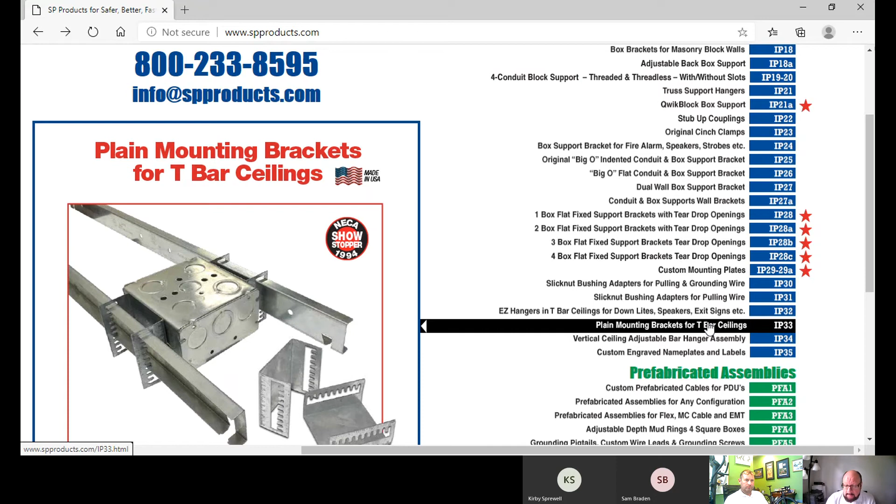We also make this style that will hold the box up, a couple different types. It's a pair, so you get 2 pieces and the 2 clips. You mount the clips to your box, and then you slide it through, and it supports off the T-bar. Makes it real easy to hang a light up. Vertical adjust. We did this for a hotel. The guy came to us and said, hey, listen, I need something that's going to be able to clip on to the T-bar in a grid ceiling, but I need it adjustable in different height lengths depending on where we're at.

So then what he said was, well, why don't you put them all together for us? So we built like 1,000 of these, put the lighting all together on it for him, and then just shipped it to him that way. And now all he does is pull them up in the ceiling and clip them into the T-bar. And then he basically uses his whip to come into the side of that electrical enclosure box there and mount it with an Arlington style or quick style MC connector. Save him a ton of money.

So prefab, as I was stating, we do a ton of different prefab. You'll see all of our stuff. We only use UL listed components. Basically all of our stuff, when we assemble it, we put a UL sticker on it to make sure that, you know, everything we do is in per UL accordance.

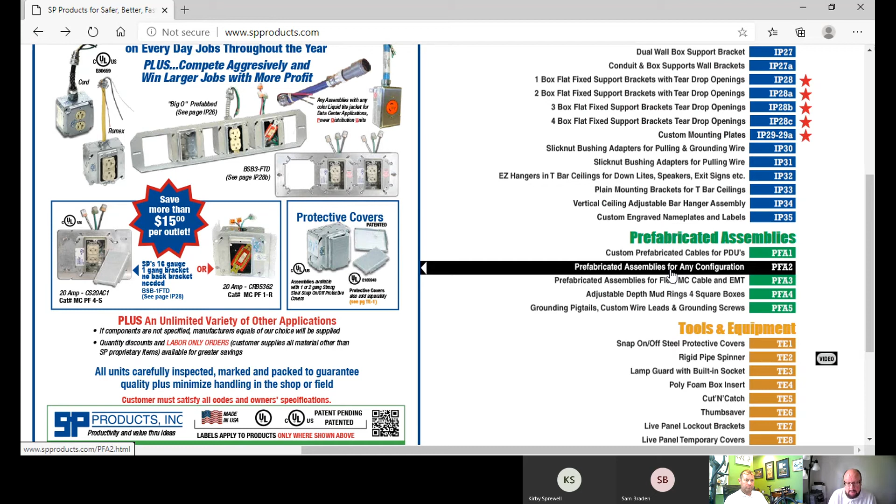They clip one in their metal and they destroy the drywall guys' router bits. The drywall guys hate them, but it keeps all your stuff nice and clean and no mud getting inside your box. And again, this is the only product in my entire line that is not made by us, that's made overseas in China. And what we did was we bought all the rights to this, the engineering rights and everything else, and we're trying to get UL to approve it as a U.S.-made product.

The reason why we got this is because, as I was mentioning before, the adjustable mud ring is huge right now because of the code changes. So a lot of our contractors that were asking us to do prefab said, hey, on these items, they're going in a hospital, you need to have an adjustable mud ring. So us collectively as a group bought a whole bunch of different mud rings from different manufacturers. We sat down and we liked these the best because this guy had the most forefront in engineering.

All of his screws on these things are captive. A lot of the other manufacturers, if you take a Milwaukee drill and you back the screw out, it will pull right out of the mud ring, and now the thing collapses, and there's no way to get it back together inside the wall. So you're screwed, literally.

So on ours, these are internal inside the box. They're not outside. Some of them that are mounted on the outside, they didn't realize you're still gonna have to cut around that drywall to get to the screws to adjust it. Ours, you don't have to do it. They're internal. And again, the guy had a pretty good depth. You could see the depth rating of each of the mud rings. So again, it's just something that we had to provide.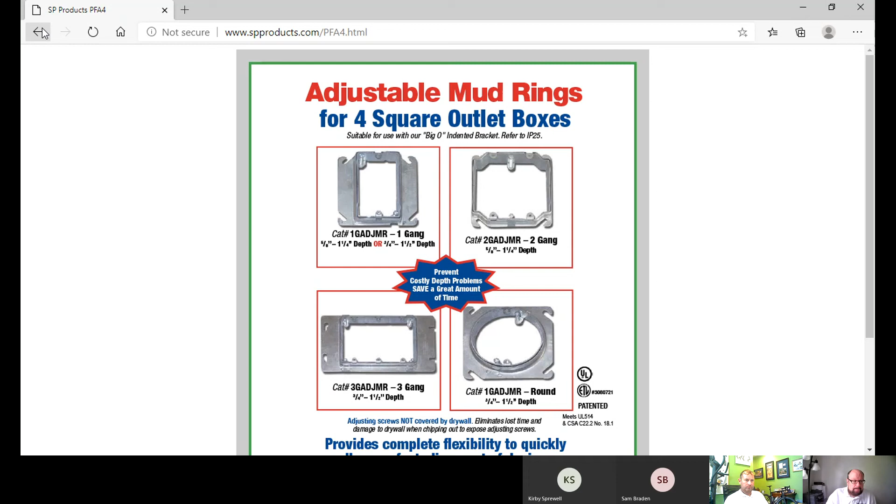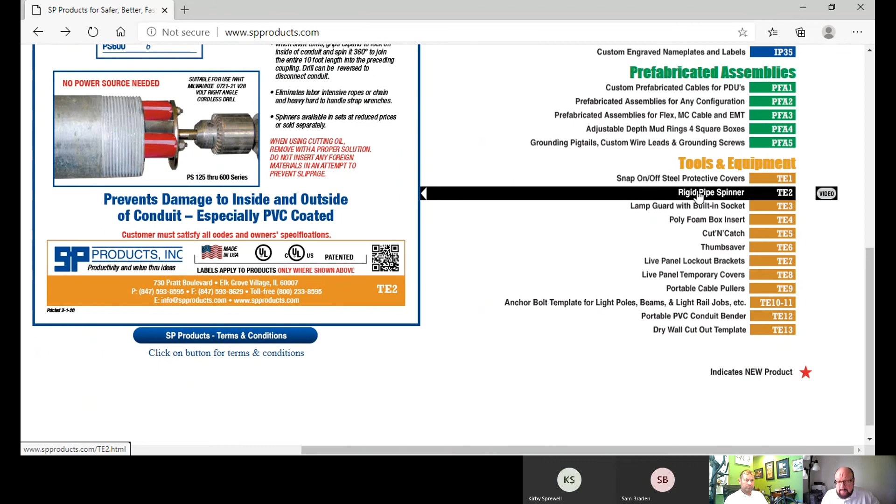And then we do have some tools. Again, our snap-off covers are here. We make this product right here. It's our rigid pipe spinner. I sell a bunch of these. Now, this product basically takes a piece of rigid pipe and puts it into a coupling, basically by using a drill.

So this product is a cam lock system. Those little red rollers go inside the piece of rigid pipe. And once it spins clockwise, those little rollers turn and lock as a cam inside the pipe, and then the pipe starts to spin. So as long as I got one thread on the coupling, I could screw two pieces of rigid pipe together in a matter of seconds.

Now, we only make these from 1.25 inch up to 6 inch, because typically, guys, 3/4 and 1 inch, you're going to spin with your hands. But where you're going to save a lot of money is if a guy's doing 4-inch rigid. I'm a big guy. I'm 6'3", almost 285 pounds. Excuse me. Back in the day, they would put me on all the heavy jobs, all the 3 and 4-inch rigid. You start out at 7, 7:30 in the morning, you're full of bravado, and you're going to get out there and do all this work. By lunchtime, your arms are beat, and eventually you're going to have arms like Popeye.

So what you're using typically is chain straps. Most of the time, you can only do quarter turns or half turns with a chain strap. This thing, I'm going to put it on a drill and spin it and be done. And on here, we have a video that you can watch after the meeting's over, and you can see how they're doing it. But I'll save you guys a ton of labor units by using this product. And a 6 inch is no more than $200.

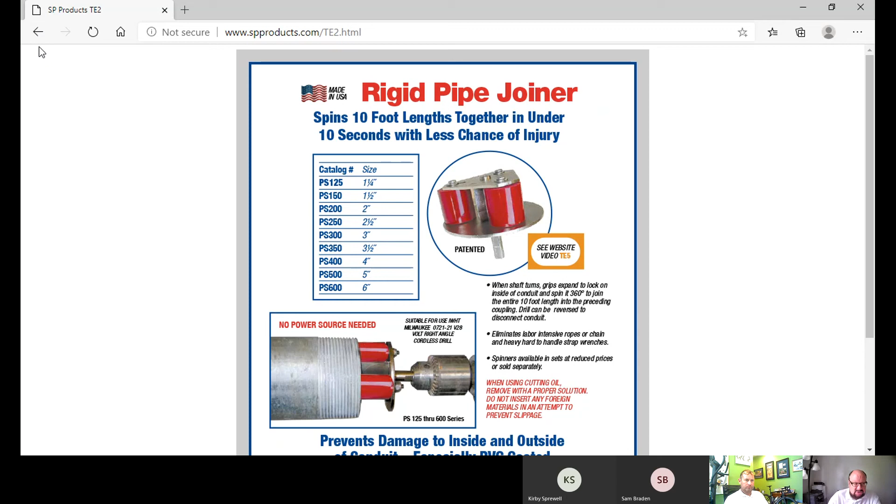So again, innovative product, something we sell a lot of. Most guys, when they see this the first time, they're like, man, I never knew something. Now, I've seen guys out there try to make stuff themselves using a coupling, but it doesn't work like this. And again, most electricians are pretty innovative. I used to like to call ourselves MacGyver. We try to make things up to help us out.

We make a polyfoam box insert. Basically, instead of taping up with duct tape for a concrete slab, you push this piece of foam in there. They pour the concrete, you pull it out, you wipe the concrete off the foam, and you reuse them. We say you can reuse them roughly 6 times on a job. So that saves you a ton of duct tape and all the goo that you get on top of a box from the tape and the glue. Never had that with our product. With our product, I could push that foam down and still get access to the knockouts. Once you tape up a box, you got to cut it with a knife to get into it.

So we make some temporary panel covers. They're popular in certain areas of the country. This little guy right here. Oh, sorry, wrong one. This is our lockout panel bracket. Real easy to do lockout and tag out. These 2 pieces of metal clip around the outside of the door, you basically put your lock in it, and it will support lockout and tag out.

Let's see here. Here's our temporary covers. So basically this goes on the front of a live panel, keeps anybody's hands out of it. Now you have to ask your local jurisdiction if you're able to use them. OSHA out in California didn't like them because they were penetrable. They had guys on a job site taking pneumatic nail guns and shooting nails through our product into a live panel. So OSHA said, nope, you got to use something else. This is a corrugated, kind of like a cardboard style product, so they were able to shoot a nail through it.

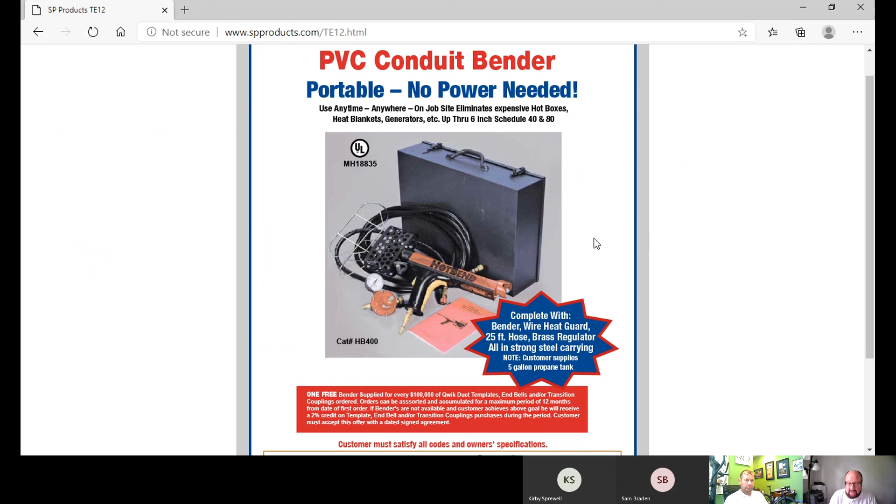And that's it. Again, we went through a bunch of different products. I'm always here for technical support. As you can see, I know the product very well. I could talk to the contractors, give them information on labor units, where it's been used, how you could use it, and how ultimately they could save money by using our product. And you can always sell this on military bases because we are Buy American and use domestic grade steel. So it goes a very long way.